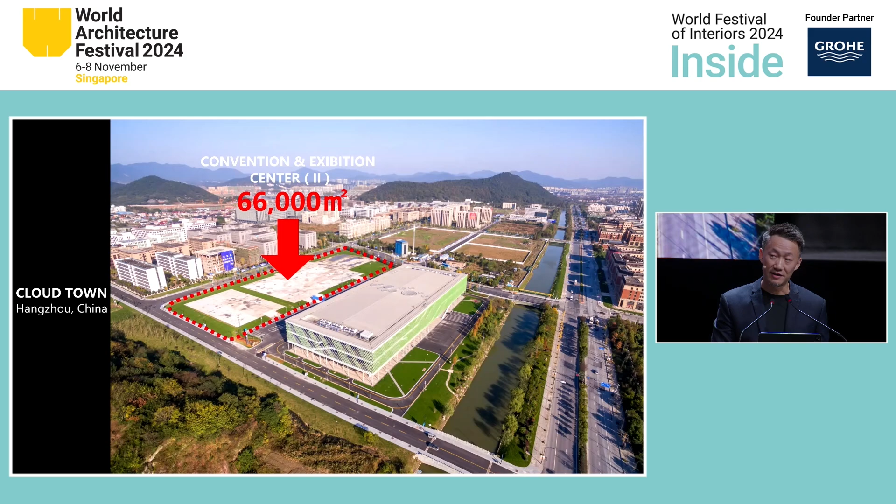disappear in the city. At that time, this idea caused a lot of opposition. Actually, in this project, we were not just thinking about how to design an exhibition center, but really about how to make such large public buildings contribute more to the city and trigger more possibilities instead of just existing for their own sake.

These are some data. Today, almost every large city has one or even several huge convention exhibition centers. They consume a lot of urban resources, but few people may realize that their usage rate is actually very low. Many of their usage rates are less than 20%. That means every year there are almost 300 days they remain idle. This causes a lot of waste in urban resources, and this situation also exists in many other similar large public buildings.

So in this project, we were thinking about whether we can make the exhibition center not like an exhibition center, and allow multiple functions to share one entity, letting the urban resources occupied by these similar large buildings release more public value.

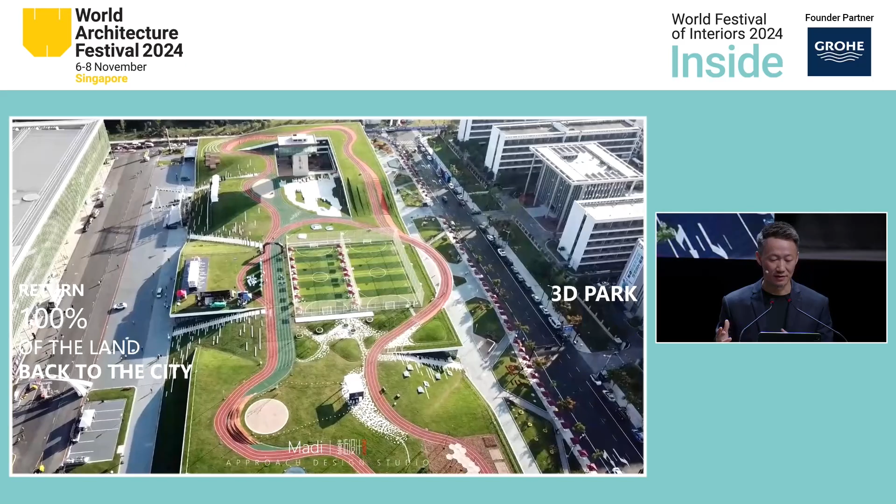And then we designed lots of gentle slopes around the building, made the entire structure appear as a natural continuation of the ground. By doing this, we return the entire 100% of the land back to the city, but in the form of a more interesting three-dimensional park.

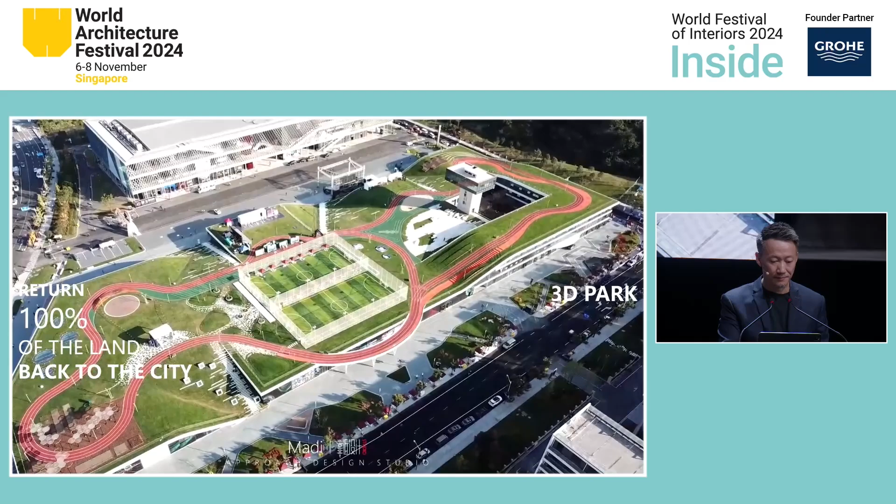In fact, the process of urbanization furthers the distance between people and nature. In this project, we want to bring this distance between them closer again. From this picture, we can see the whole building also looks like the continuation of the mountains.

We persuaded the client to cancel all the fences and integrate the building with the streets, so that citizens can freely access the rooftop park from any direction. We initially designed slides on every slope, so people can climb up from one side and slide down from the other. But during the installation process, the client canceled all the slides due to safety concerns.

But it didn't stop people wanting to slide down the slope. Every day they just love doing this. I don't know why.

Of course, most of the time, people use the slope in a rational way. They enjoy sitting and resting here, enjoy the sunlight. We cut some openings on the slope, allowing sunlight into the room. And in the evening, the indoor light also attracts people to climb up the slope to watch the activities inside.

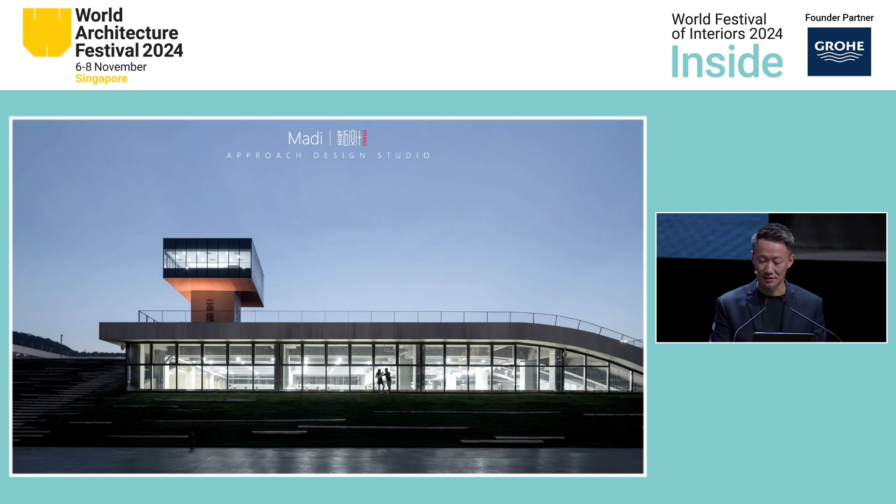The rooftop is not just a park. We also imagine it as a giant Lego base plate where we can plug in various fun facilities. For example, we added two football fields, a 700-meter long running track. We designed one section of the track to be completely elevated, crossing above the street. It offers a unique and joyful running experience. We also designed multiple routes so that joggers can choose different lengths and different difficulty levels.

People love to exercise and spend time here every day, but interestingly, many of them don't actually know that this structure is an exhibition center. That's exactly what we wanted, for the building to have multiple identities, multiple functions, serve more people, and trigger more possibilities.

We added a watchtower on the roof, which is also open to the public. We didn't assign a specific function to it, allowing citizens to design how to use it. They can host meetings, have classes, do yoga, and enjoy the great view here. In this photo, we can see someone even brought a big telescope here.

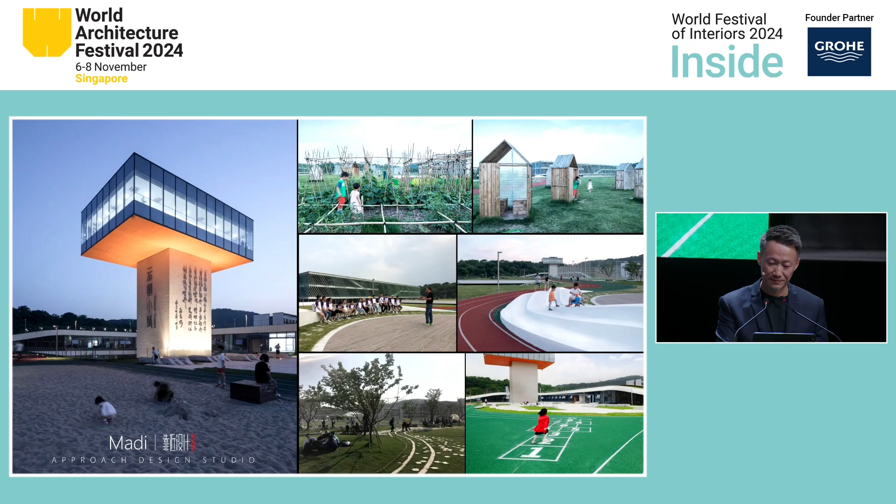These are some daily things every day from morning to night. People love to come and enjoy this place. They love jogging, walking, camping, playing football, and doing other interesting activities here. And at night, we can see couples proposing here and friends whispering in the small cabin. Now this huge building has truly become a part of people's daily life.

Due to such building and design, it has inspired many new community activities, such as sports games, football tournaments, concerts, and parties. It also has inspired many new clubs, such as Tai Chi Club, Baseball Club, Model Airplane Club, and many more. We also embedded numerous sockets on the ground, on the lawn, so when people have new ideas, they can just simply plug them in like playing Lego, allowing this building to grow freely with people's imagination.

The roof part covers the main entrance of the exhibition hall with the stairs. It could be used as a theater, outdoor theater. And in the summer, people like to gather here to cool off.

Even the freight ramp in the corner, we designed it in a folded origami-like way. It has become a popular spot for young people to hang out. And we hope that every inch, every space can trigger new possibilities here.

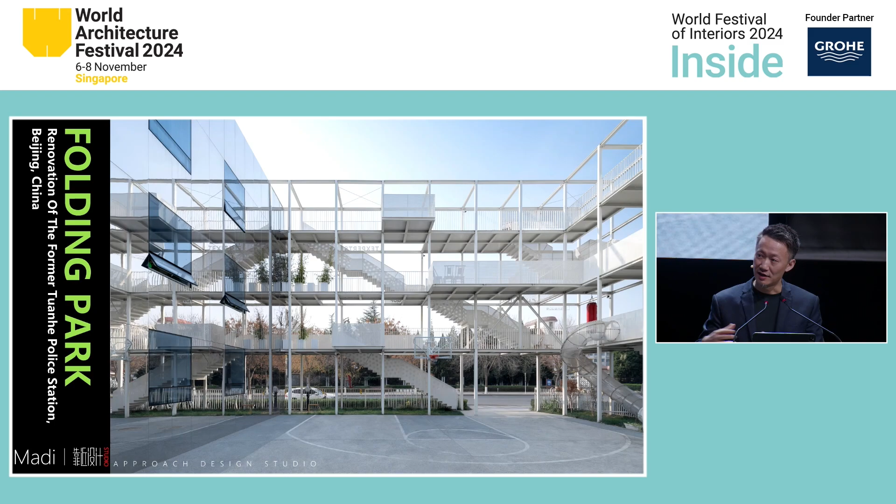In this project, we are not only considering how to renovate an old building, but also thinking about how each renovation can contribute extra public value to the city instead of just existing for its own sake. We also hope to explore a new relationship between architecture, the city, and urban spaces.

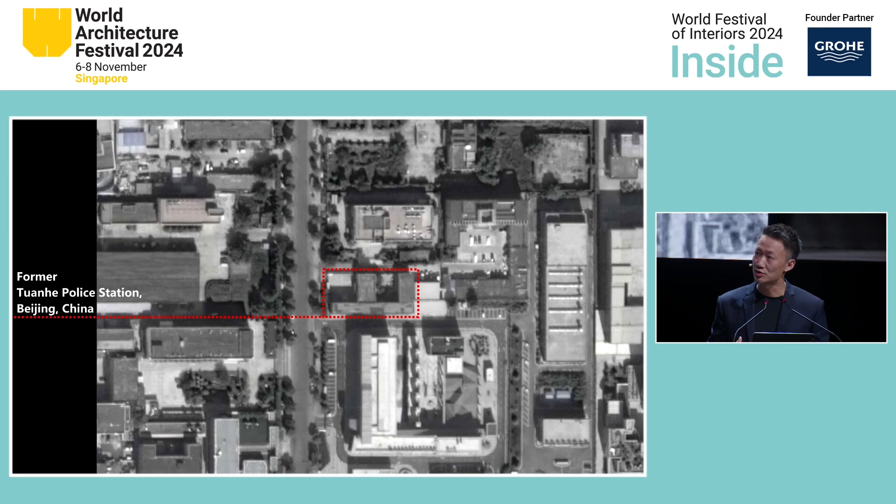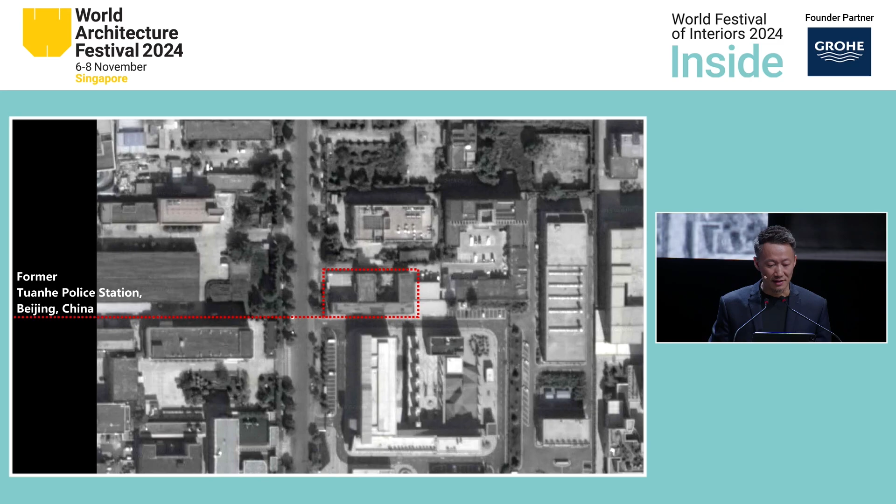The site is located in an old district of Beijing, China. The area used to be an industrial zone, so public spaces here are very scarce. The original building is a three-story abandoned police station with an F-shaped layout, and the site is quite cramped. The design task is to transform this police station into the headquarters of a media company.

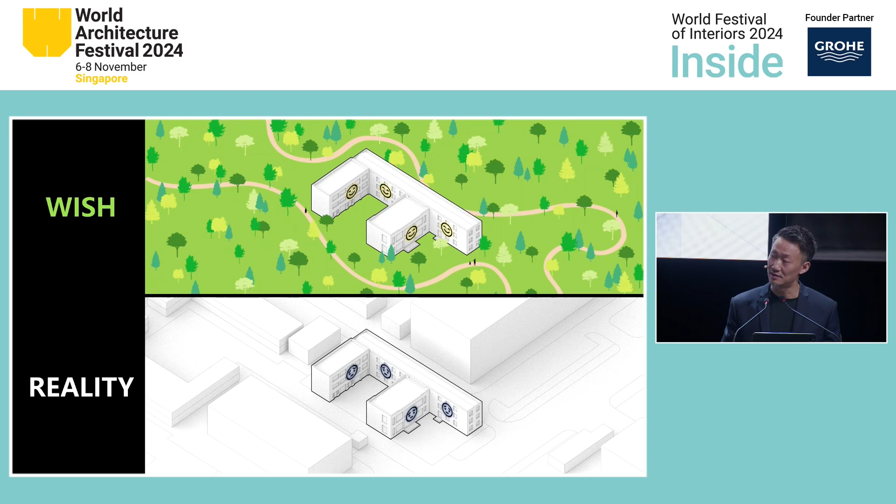Then we asked ourselves a question: does the park have to be flat? We also considered another question. We all know there is a legal property line between every building and the city. So besides symbolizing the boundary of territory or becoming a cold fence, what else could this invisible line be?

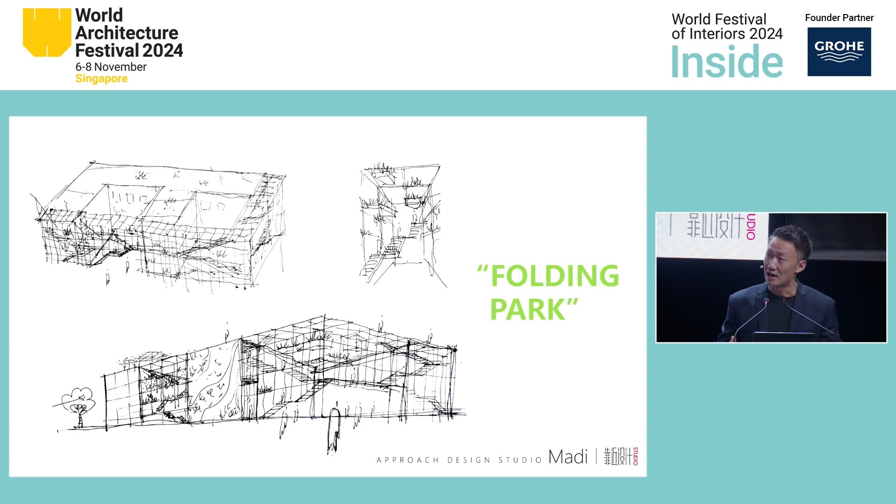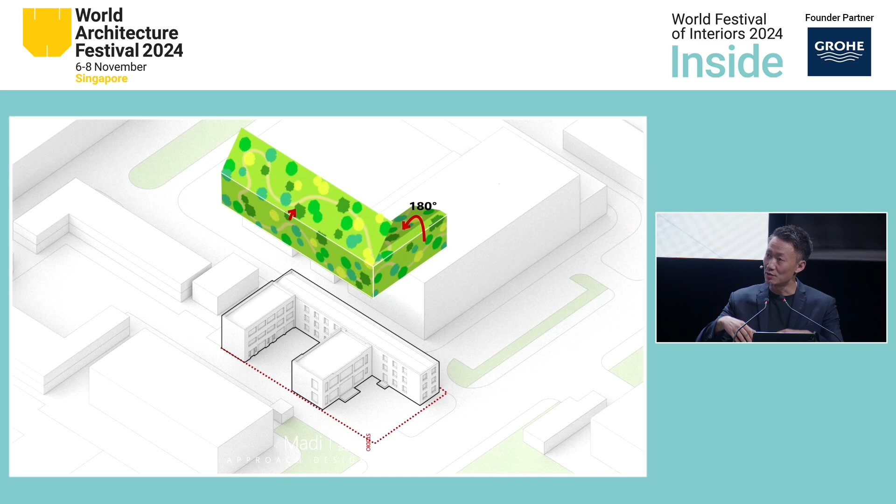These are the initial sketches. Then we came up with a concept: folding park. We took a traditional flat park standing upright and folded it to match the site boundary. Then we folded inward to match the height and give it a volume. Finally, we attached it to the building, replacing the original fences and creating a new boundary of the site.

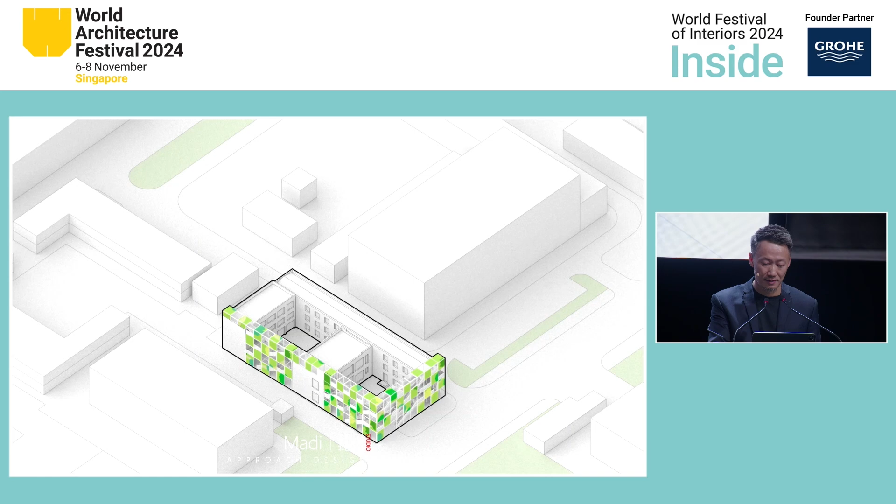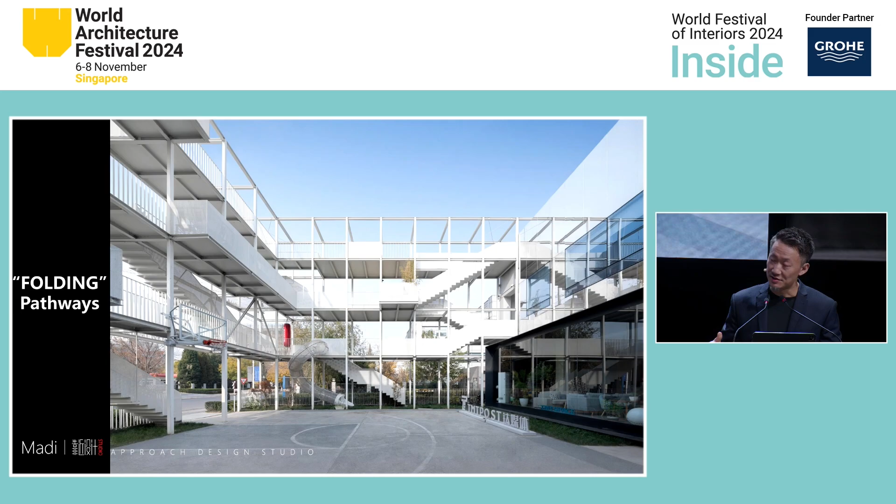Most importantly, we persuaded the client to open this park to the public, allowing everyone to enjoy it. We also folded the traditional park pathway and integrated it into this new park. And we set up several platforms with chairs and tables for people to linger, making them feel like they are in a traditional city park.

They become these interesting three-dimensional winding paths that encourage people to climb and explore, offering a completely new walking experience. We even hope they can get lost here.

Here's an interesting story. Initially, we designed fixed green walls over the park. But before the workers could come install them, the community had already come to decorate this park in their own way, because they loved it so much.

We suddenly realized that without the fixed green wall, there would be more room for people to have more imagination, and the park would have more function, more possibilities. So we cancelled the installation, leaving it up to the users, leaving it up to the community to design what this park should be like.

This is a typical daily scene. Citizens love this unique park. They like to spend time here every day. We also installed fun facilities like punching bags, swings, slides, and other things to engage people and encourage them to meet each other and participate in these facilities.

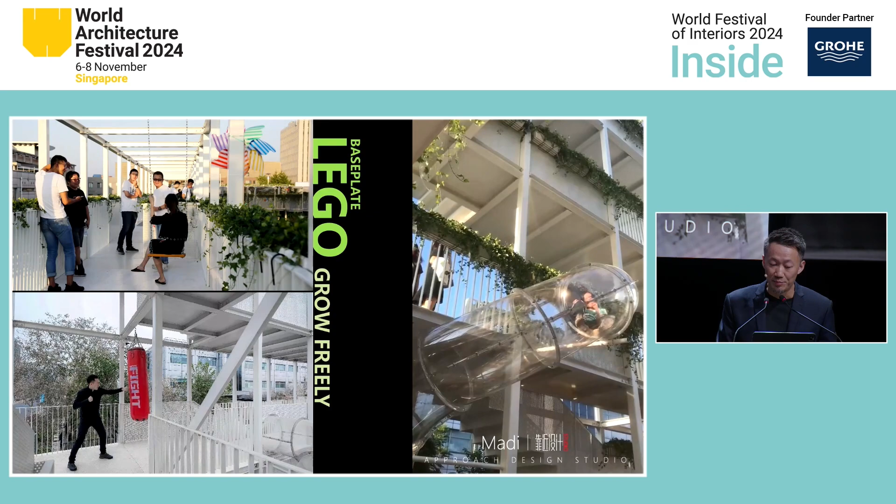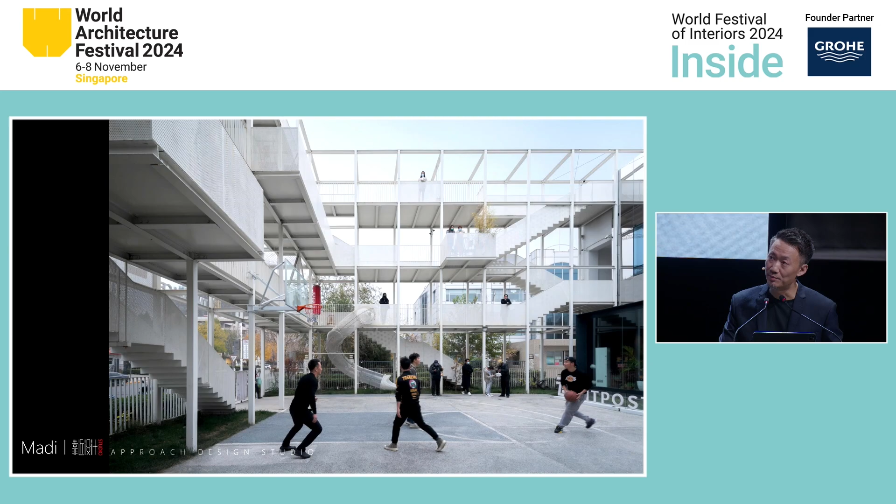People can also imagine this park as a giant Lego board where they can plug in any new and fun ideas anytime. For example, when we installed a basketball hoop on the inside of the facade of the park, the front courtyard became the only basketball court in the block, and everyone could enjoy it.

A basketball game could happen at any time, and it will attract people's attention. At this moment, the entire park could become the spectator stand, offering multiple perspectives for the audience. Oh, he missed it.

The front courtyard I mentioned before is full of energy, and the other courtyard on the inside is relatively quiet, suitable for thinking and discussing issues.

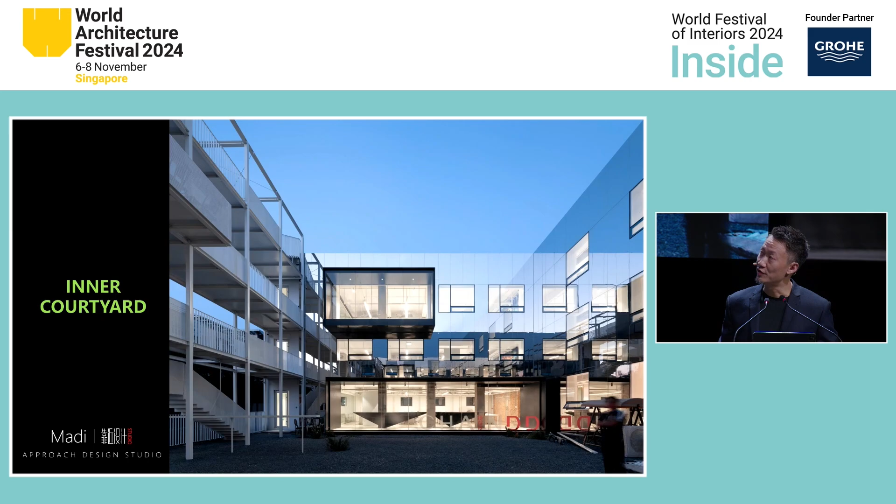Through this folding park, we transform the original cold fences into a shared vitality trigger strip, contributing new public spaces to the city and constantly animating the whole area. We also hope to change the current cold and opposing relationship between architecture and the city, making every building's boundaries as soft and kind as possible.

As for the building itself, we didn't think about how to highlight or sculpt it, but instead covered the facade with mirrored panels. We want to make this building disappear.

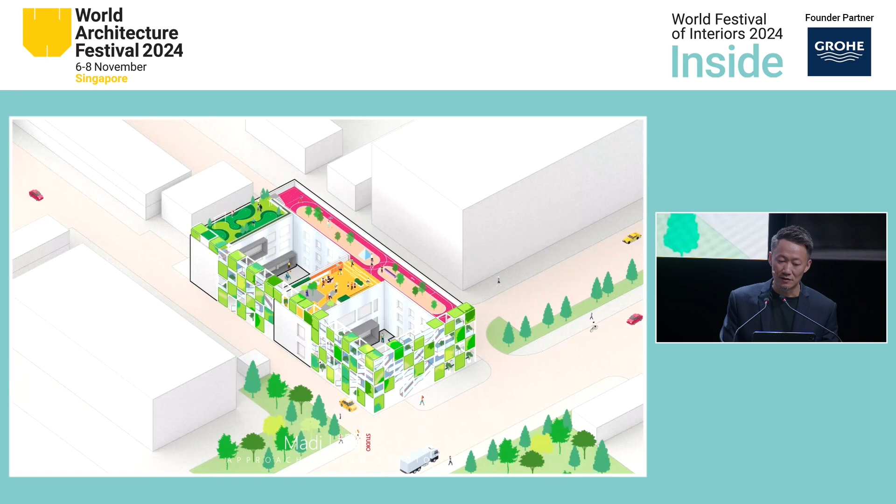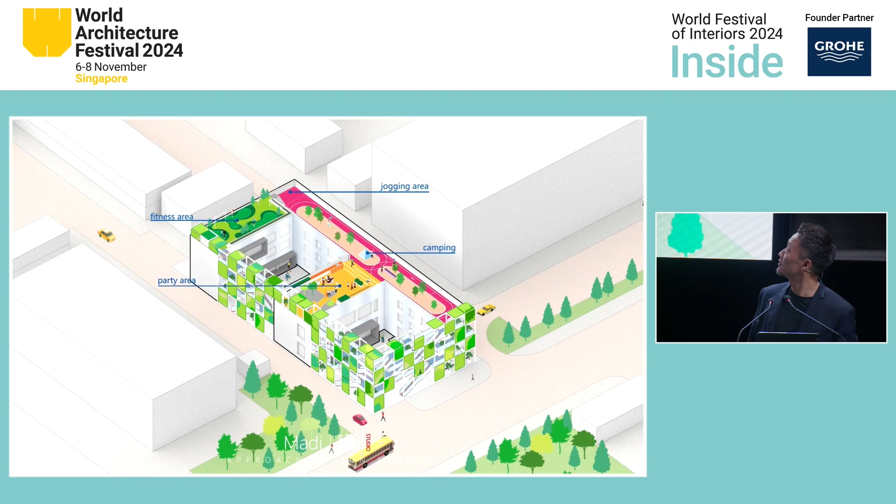The folding park naturally leads people to the roof, turning the rooftop into part of the park. Here we designed a 50-meter running track, an area for parties, and an area for fitness. These are also open to the public.

People love this rooftop. They can exercise here, they can play golf, and often hold different spontaneous community events. I've been to a cocktail party here recently—it's really fantastic. As I mentioned at the beginning, the activities triggered by the building are far more interesting than the building itself.

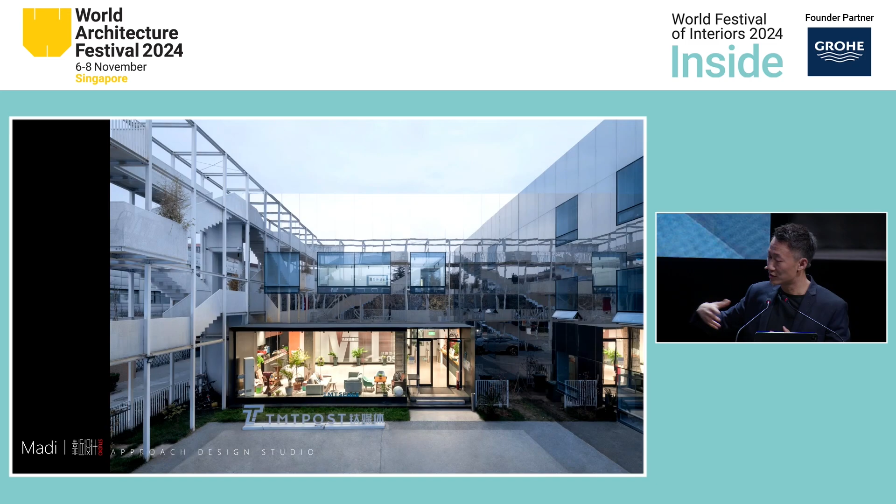Besides the folding park, we also persuaded the client to open the lobby to the public, turning it into a reading room so everyone can enjoy it and rest here. The turnstiles for staff are actually on the inner side of the lobby.

Regarding the interior renovation, we didn't make any deliberate decorations, but rather created as many flowing spaces as possible. Many spaces have been given multiple functions to encourage more interactions.

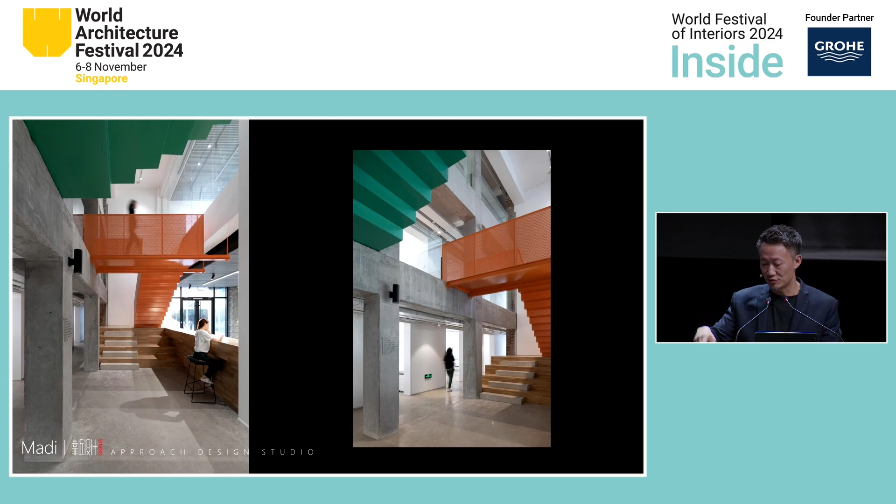We also expanded the original enclosed stairwell into a mini atrium. We want to create a visual connection between different floors, so staff on different floors can see each other. We rebuilt the staircases within the atrium to create more opportunities for staff to meet and interact with each other.

In addition, we want to make all the staircases here as interesting as possible, to encourage people to take the stairs instead of the elevator.

Looking back at this design, this might be a somewhat less serious renovation. The building, which was supposed to be the main focus, finally takes a step back into the background, while the seemingly insignificant and even overlooked elements outside the building finally become the main character of this site.

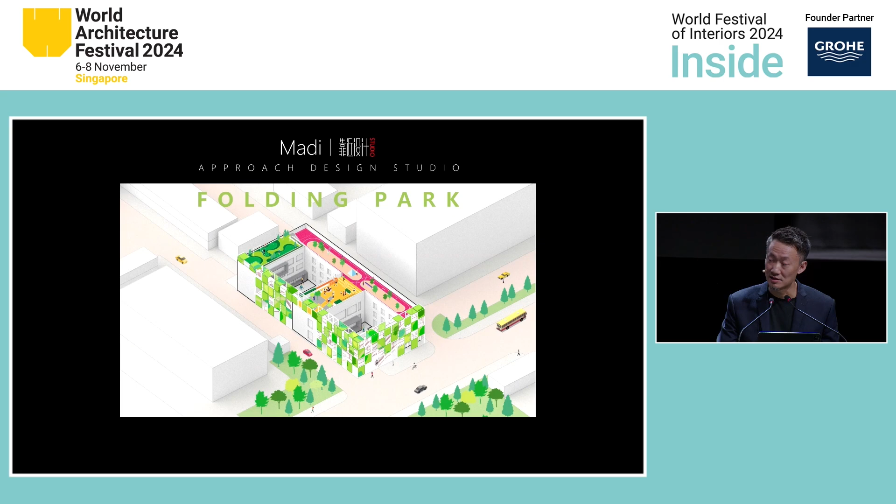But what makes us very happy is that this bold exploration has turned this project into one of the most beloved places in the community, and has also gained high attention from the government. It's said that the government is now studying this project. I hope one day our approach can be applied to other cities and other projects.

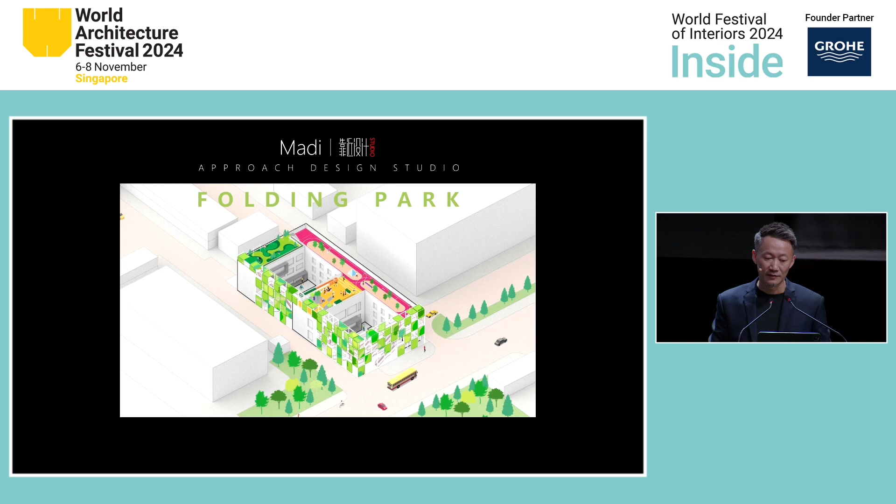The third and last project I share today is a high school named Ningbo Huizhen High School, located in Ningbo, China. Fortunately, this project won last year's Building of the Year. That's a great honor for me and for my studio.

In this project, although we were designing a school, our focus was not on how to make students study efficiently, but rather on how to make them escape from study, feel relaxed, and inspire their imagination.

About school design, have you ever thought about what's the most valuable part of a campus? My answer is: it's not the classroom. It's the natural space outside the classroom.

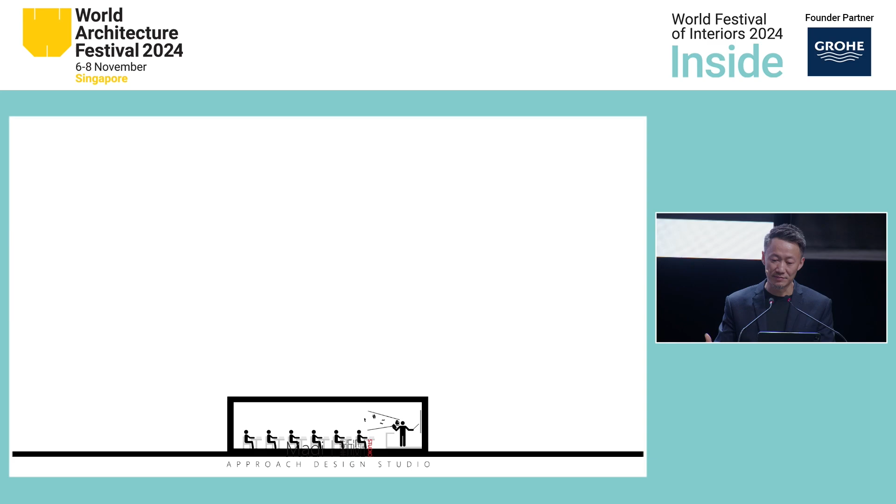Because I think all classrooms are essentially the same everywhere. They just put students into boxes and fill them with standardized knowledge from the same textbooks, like machines. The only difference may be that each machine looks different or is tuned differently.

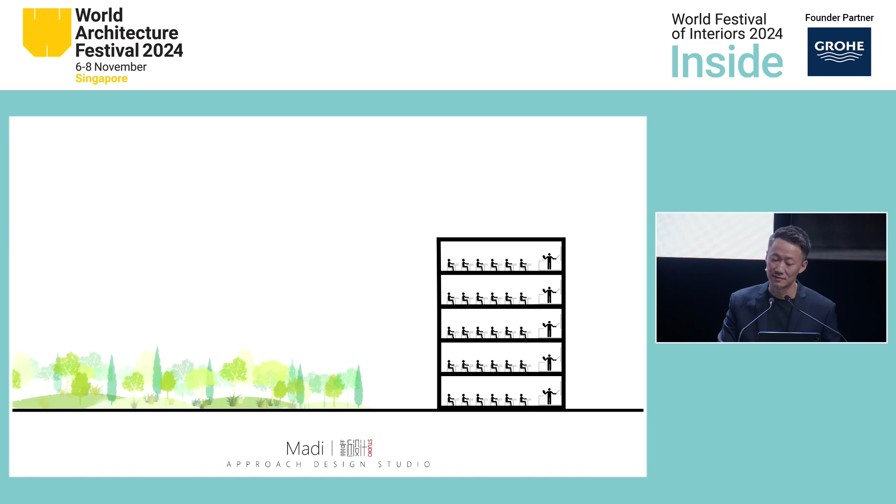However, the natural space outside the classroom, the parks, are different. Their purpose is to let students relax, do what they want to do, and more importantly, let them briefly escape the machine and find inspiration in nature, allowing their minds to roam freely. So I think this seemingly useless natural space on campus is actually the place that could spark students' creativity and imagination.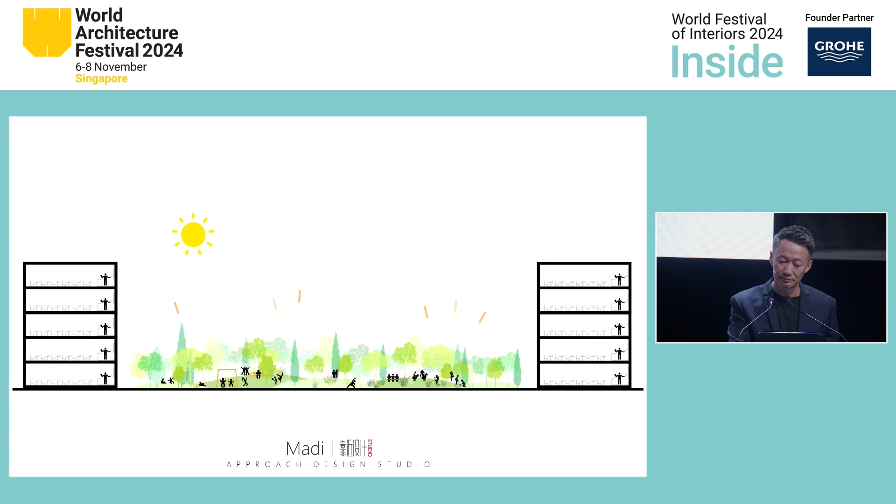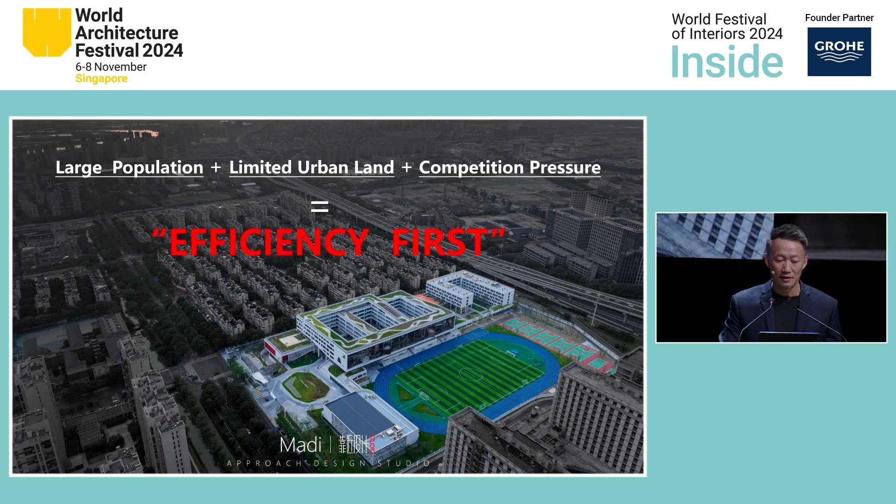However, few people may realize that due to our city's large population, limited urban land, and huge competition pressure, when building high schools, efficiency comes first. In order to build as many buildings as possible on limited sites, natural spaces slowly become the gaps. Today's school may look more beautiful than before, but in reality, the spaces that truly let students think freely and relax have disappeared.

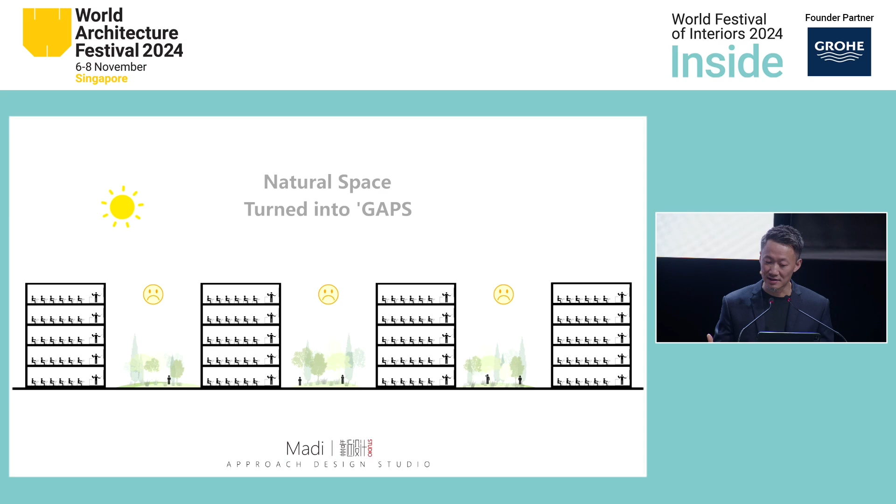Surely, in a school, efficiency is important, but for these adolescent students, we believe that having a place to relax and release stress in a timely manner is more precious. And we also believe that only when a person really feels relaxed and present can their imagination and creativity truly flourish.

If we ask ourselves, when do we feel most relaxed? I think the best answer may be when we are wasting time. Although wasting time is kind of a negative word, for students under great pressure, moments of wasting time and emptying their minds seem to be the best way to decompress and relax. So in this project, we aim to design a school where students can waste time mindfully.

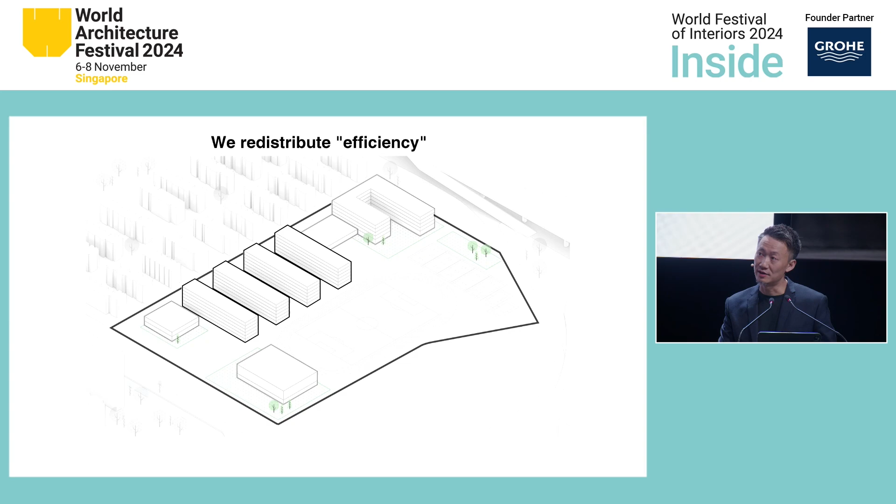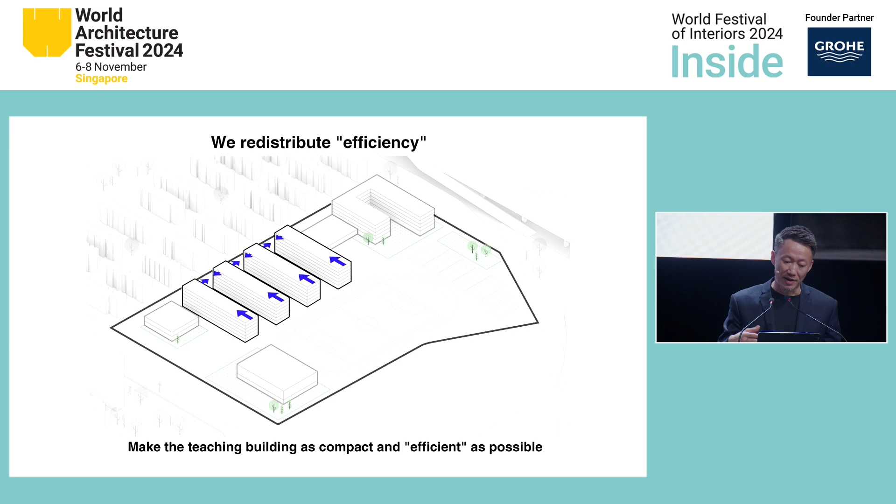Our approach was to redistribute efficiency while keeping the overall level unchanged. That means we didn't change the overall area, we didn't change the overall cost, we didn't change the school's requirements. We just redistributed the efficiency, making the teaching buildings as compact and efficient as possible, using every inch of space.

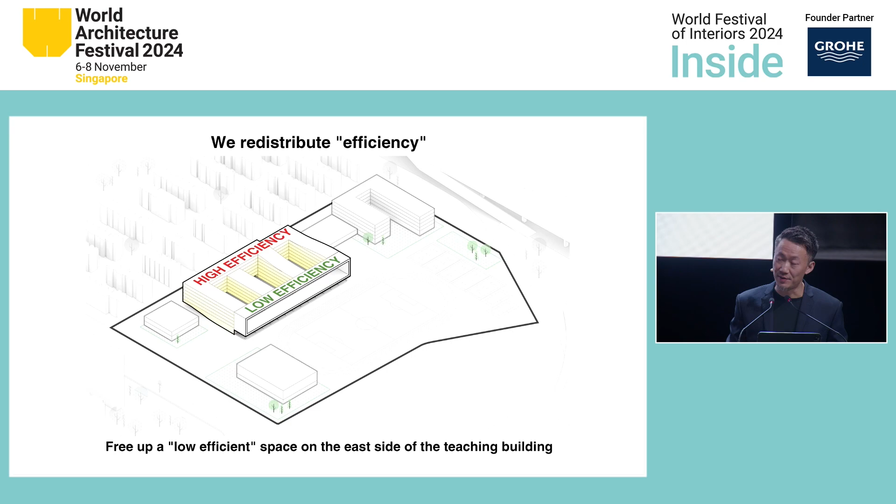And the surprise is this leaves us with a large, low-efficiency space facing the track field and also facing the direction of the rising sun. We turned this vacant space into a floating forest and filled it with interesting facilities.

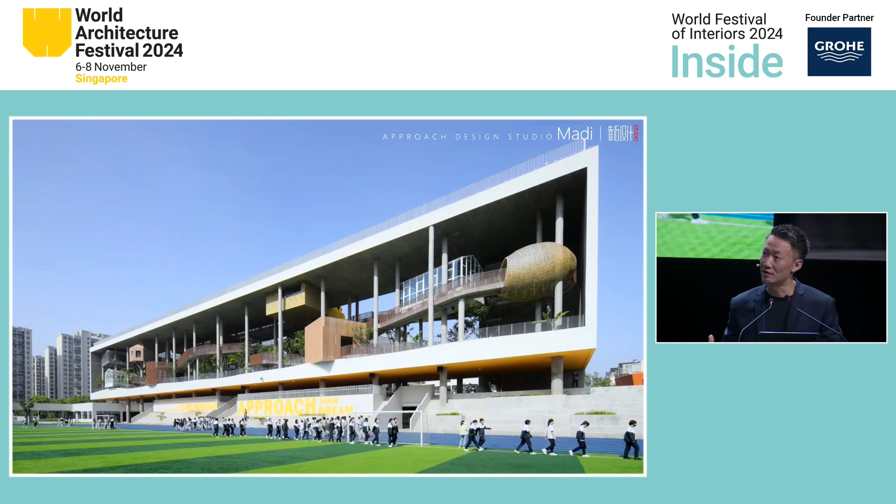Finally, we created this space that doesn't look like a school at all. It's filled with large plants and sunlight, resembling a giant adventure park. One day, a student told me that it looks like a scene from Indiana Jones. I said, yes, you can be Indiana Jones here.

In this space, there are no traces of a learning atmosphere. Actually, this space doesn't even look like it's in the city. Instead, it's filled with the charms of countryside.

Usually, within a 10 minute break, students don't have enough time to go downstairs to do activities. They are just stuck in the intense study atmosphere. So here we let the forest cover each floor of the buildings.

After class, students can arrive here quickly and enter into this very soft, interesting forest. Here they can completely escape from the study atmosphere, give their mind a break, and waste time mindfully. Then after 10 minutes, they can return to the classroom with renewed spirits.

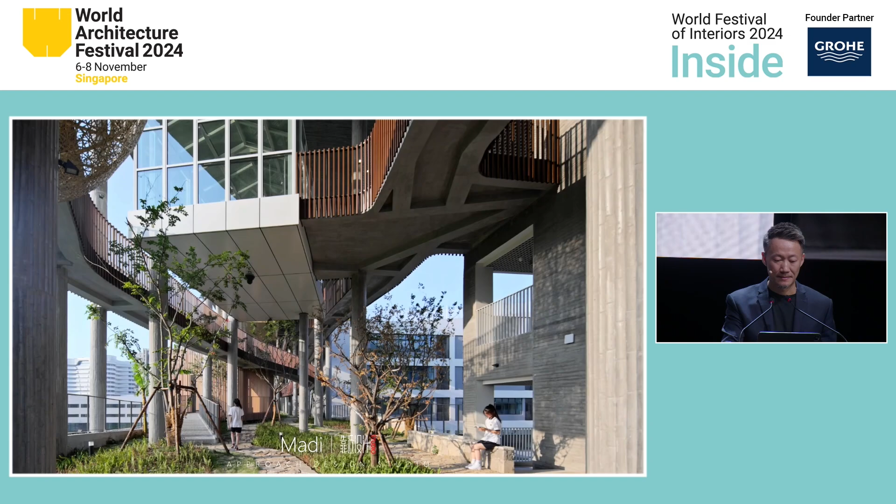Actually, this clip was filmed during class time, so we were curious about why this student was here. Maybe he was just sent out of the classroom, but now he seemed to be enjoying the moment.

We want to create two completely opposite spaces on a campus: a place to concentrate on studying during class time, and a place for wasting time mindfully after class. Actually, these two completely opposite places are only separated by a single wall.

The scale of this forest is vast, with a total length of 120 meters and a height of 4 stories. We have hung several different shaped boxes that look like tree houses. We also designed an intertwined elevated gallery to connect the forest ground, the tree houses, and each floor of the buildings, providing students with rich and varied paths for exploration.

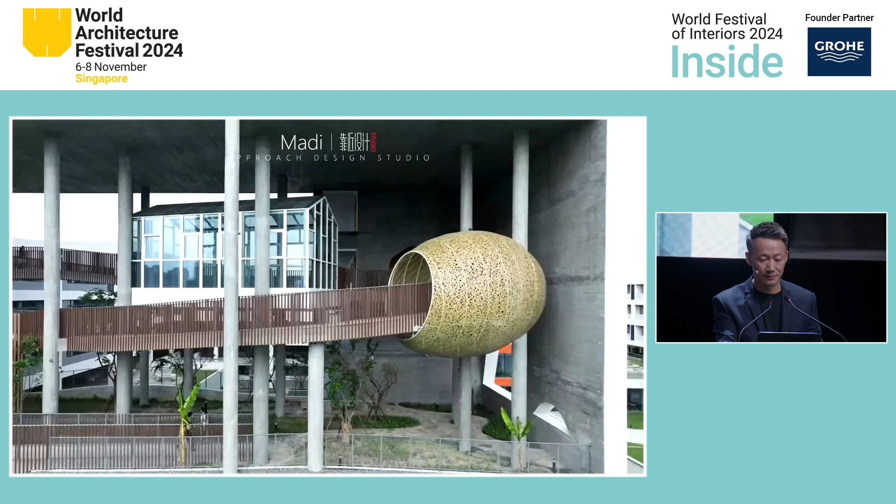This tree house was not assigned specific functions. Teachers and students can freely decide how to use them. We find that many classes prefer to move their lessons to these tree houses, and when the weather is nice, even the roofs of these tree houses can serve as classrooms. Obviously, having class in the forest without walls is much more interesting than in a conventional classroom.

In this large forest, we want students to truly relax, do whatever they want to do, enjoy the sunlight, enjoy nature. Occasionally, they may meet at the intersections and engage in casual conversations. Here, we want pressure and time both to be off.

Traditional school buildings separate the site, creating several enclosed and oppressive spaces between them. In this project, we raised all the teaching buildings off the ground and made the divider spaces a continuous garden street. This space also becomes the second park of this campus.

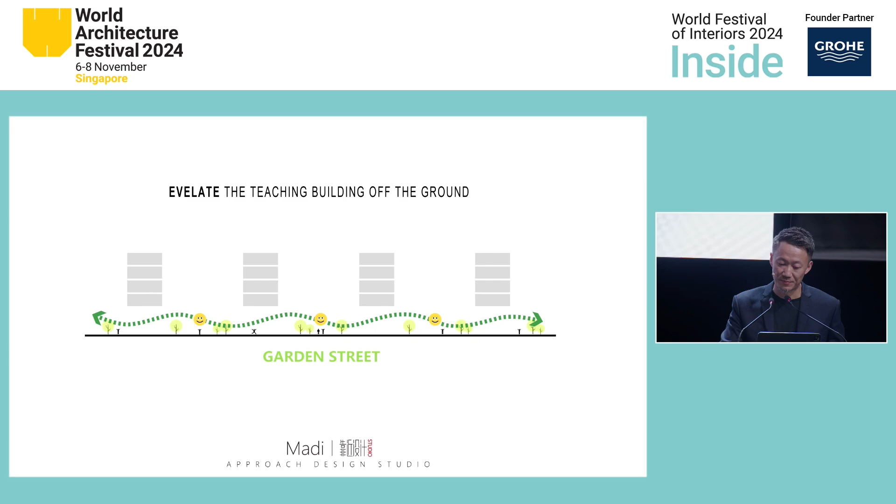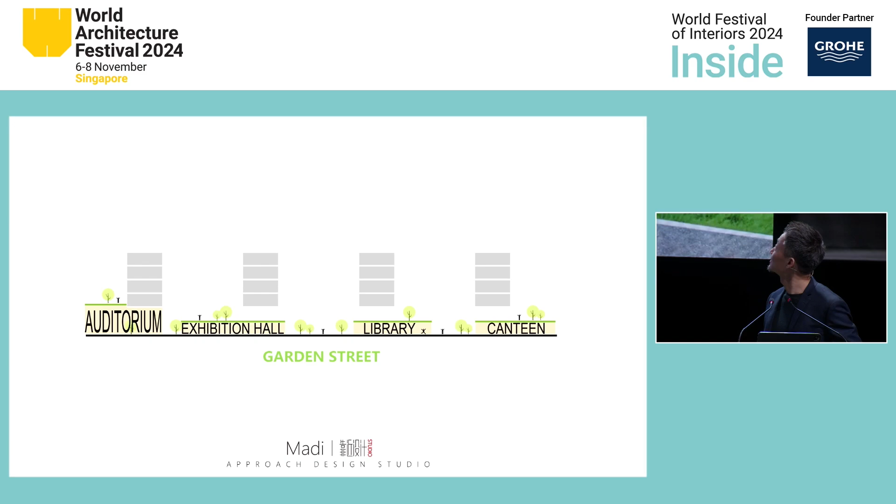Then we spread the theater, library, cafeteria, exhibition hall, and labs along the street, creating a series of interesting outdoor activity spaces. We can see that when students enter the campus, as if they were in a public garden street, they can roam freely across the campus instead of walking past a bunch of rigid buildings and enclosed spaces.

The interconnected teaching buildings naturally formed a large-scale rooftop park looking like a Mobius strip, and this becomes the third park of this campus.

The rooftop park is partly connected to the forest. Together, they form a rich layered super park system that wraps around the entire building. Whenever students have time, they can stroll and unwind continuously in this super park system. The undulating roof feels like layered hills, making a simple walk even more enjoyable. And the rooftop itself also becomes a landscape in the city.

The rooftop park also provides shelter for the forest, making the entire forest an all-weather activity space. We also made a hole in the ceiling and used a simple mirror reflection to create a periscope-like device, allowing people in the forest to see the activities on the rooftop.

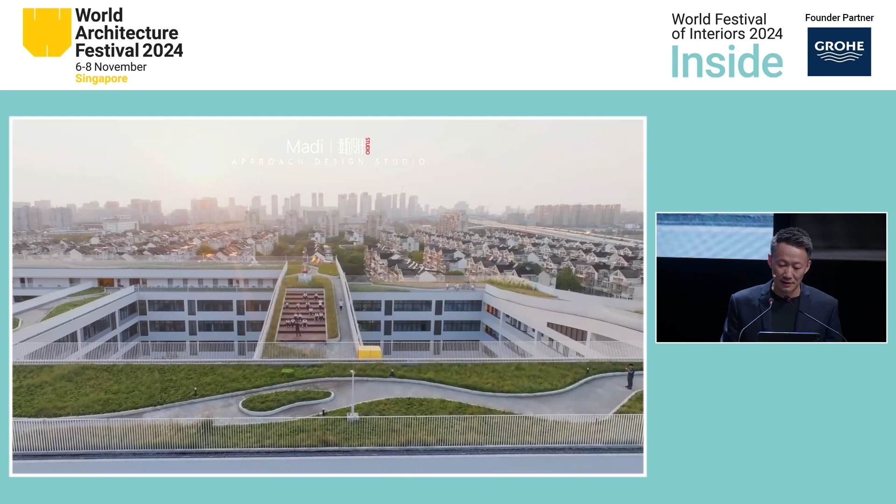Yeah, this is the other perspective. We also use this slope to build a set of steps. When the weather is nice, classes can also take place on the rooftop. And this dome actually is an air vent for the lab.

We want to make it not boring. And the other side is a blackboard allowing students to draw something on that.

Most importantly, I want to say, when students step onto the rooftop park, the overbearing school will completely disappear from their view. They only see the soft, natural surroundings, the vast city, the boundless sky. At this moment, I believe their body and mind experience complete relaxation.

Usually the side of a school facing the track field is the most important facade. But here we made this facade disappear, replaced it with a natural forest. We believe that nature and the students' activities are the best designers.

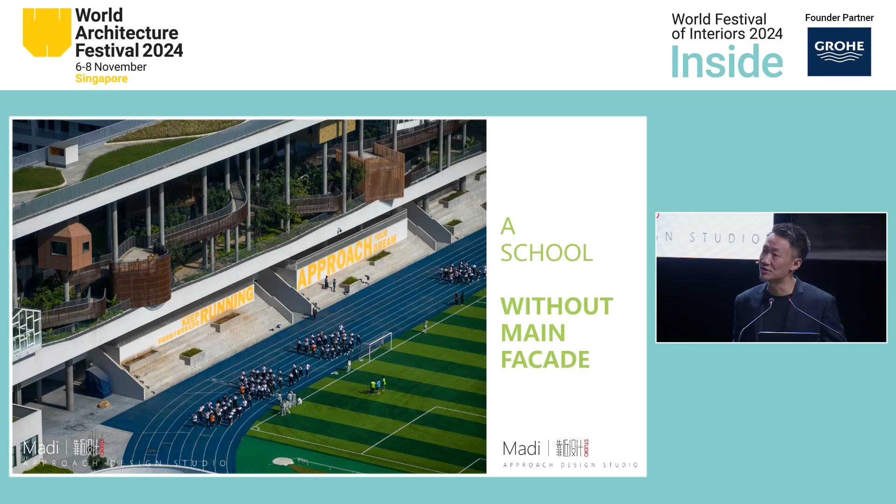As time goes by, this forest and all the parks here will grow increasingly large. We hope this school can grow freely alongside the students. I really like this picture, this photo, because it doesn't look like a school at all.

In this project, we try to make the whole school, the whole campus take a step back, truly letting students be the protagonists. What we hope is to provide as many opportunities as possible for them to feel the nature, feel the sunlight, feel the beauty of youth, and encourage their minds to roam freely. I think this is how youth should be.

Okay, back to my original point. I think for tomorrow, when we are designing our projects, our thinking should not just be how to go forward. Sometimes architects and architecture can take a small step back. Maybe then it can take a bigger step forward. Thank you.

Okay, well, thank you. I can see why you won the prize last year. Just reminded me how fabulous it is. Yes, thank you.

When you started to study architecture, did you have the ambition to make huge buildings? 66,000 square meter buildings? When did that arrive?